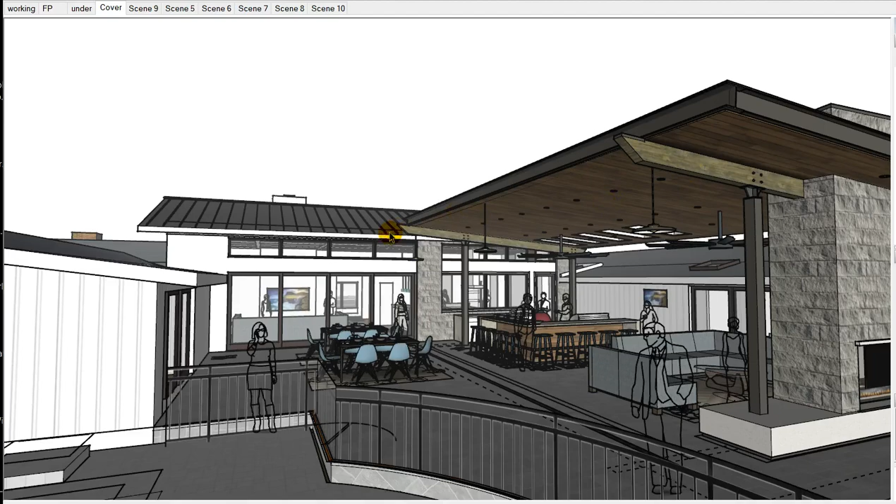Hi guys, I wanted to quickly show you three different roof options that I think are worth considering for the newly increased height area, the kitchen and the family room. I'm calling them the light touch, the medium touch, and the heavy touch options.

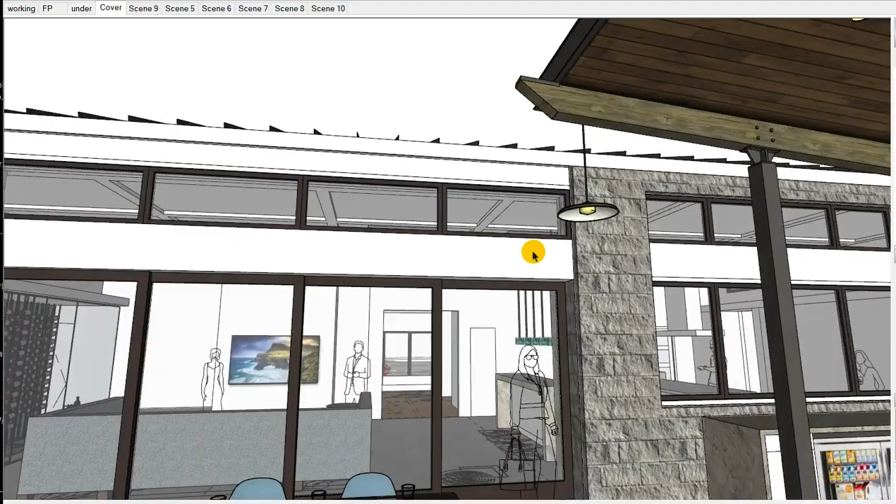Now here we're looking at the light touch. This was the one I was showing you before. I think it's appropriate given the scope of the work you're considering, concerns about the total cost of the project, and strongly based on the images you shared, which had this flat gridded ceiling.

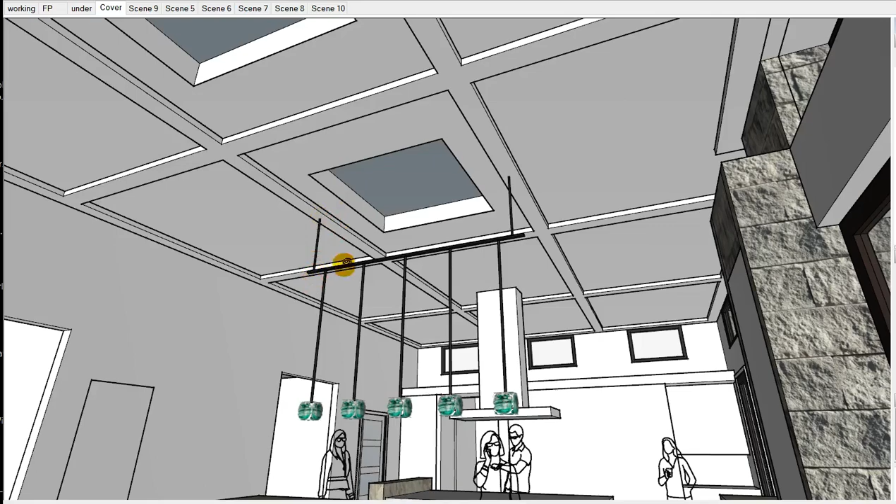Two skylights here, I think, work really nicely, as stated before. You mentioned a concern that pendants may not work at the skylight, but I think a solution like this would work, where a custom bar could be built and suspended, with power routed through it to the individual pendants that hang from that. If it can hang from a ceiling, it could be modified to hang from a bar. So this is an elegant solution for any pendant array you might want, including the little 5.5 inch glass spheres you already have.

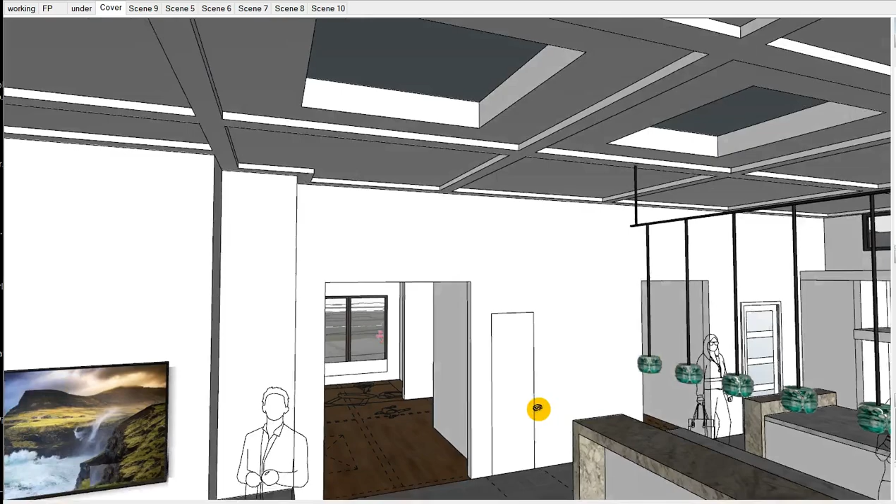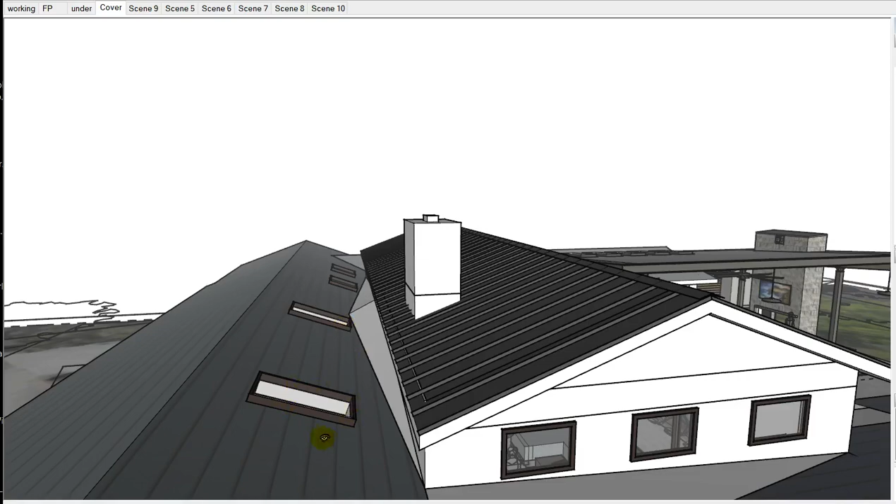So I like this option, but I know you have valid concerns about how water's going to shed away. What I'm showing here is conceptual. Your builder's roofer might be able to make this even better. Your roofer and flasher, when they get up there and actually see the skylight openings, might be able to increase the slopes of these crickets to get the water out and away even faster.

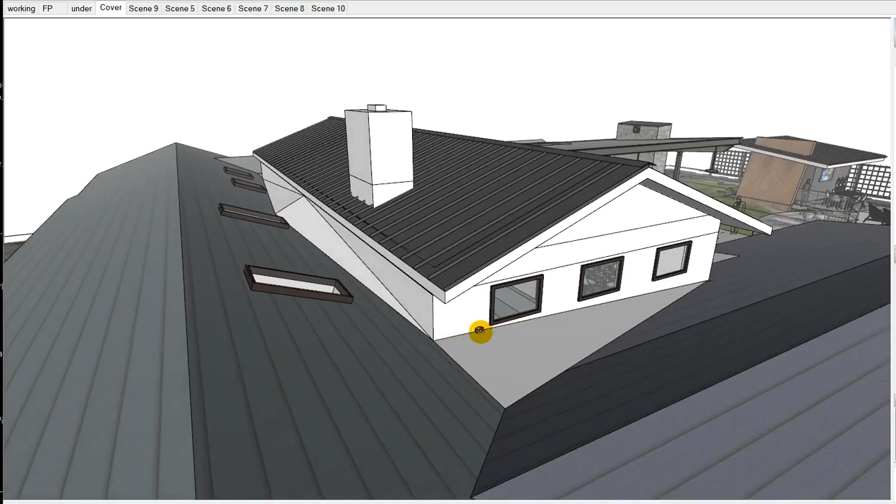But when water lands in this spot or on this roof and starts coming down this way, it's got a clear path out and around. That's what's shown in white right now. Again, this is all conceptual, and it's tight. This is not an ideal solution, right? But you guys know you're not in an ideal spot, having to remodel the project on the fly.

But this, I think, is the most cost-controlled method without really sacrificing anything on the design. I love this design. First and foremost, this design is great. I think this works, right?

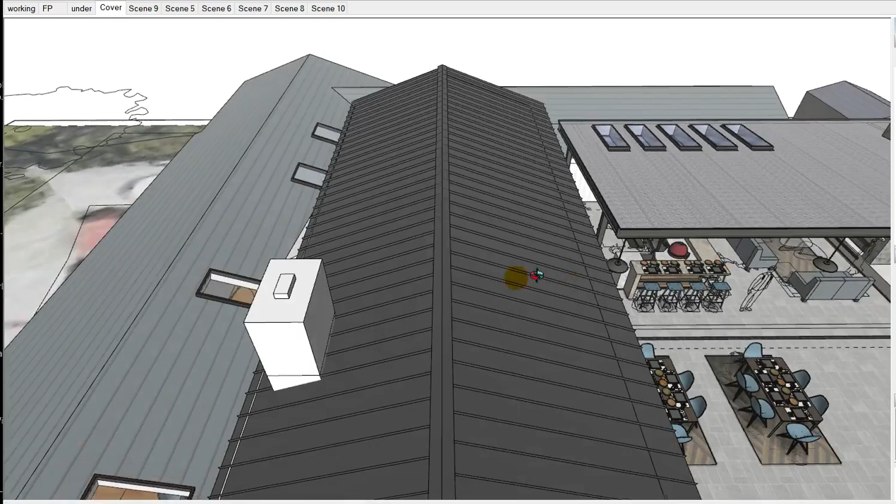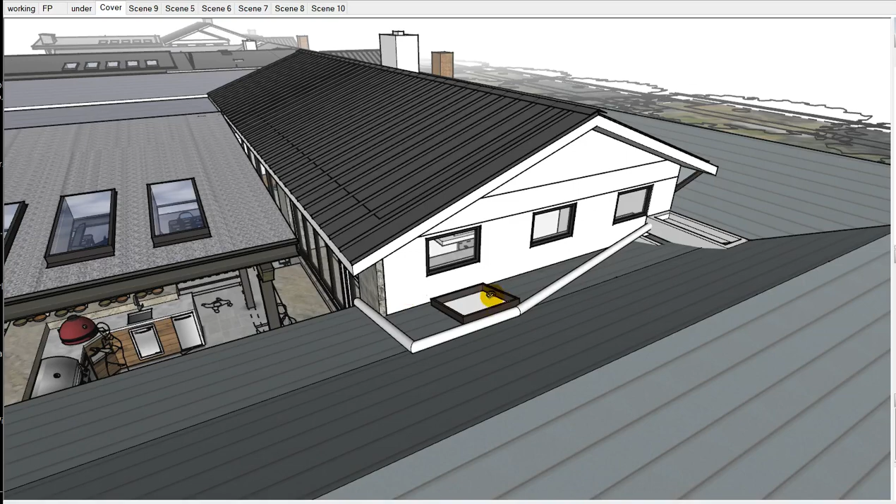These are the existing skylight locations at your existing roof. I think this has minimal impact. On this side, maybe it gets a little wonky. I'd love to build another cricket over here, but there's this existing skylight at the hallway, and if we do a cricket, it's going to bisect the skylight. I think that's going to get a little weird.

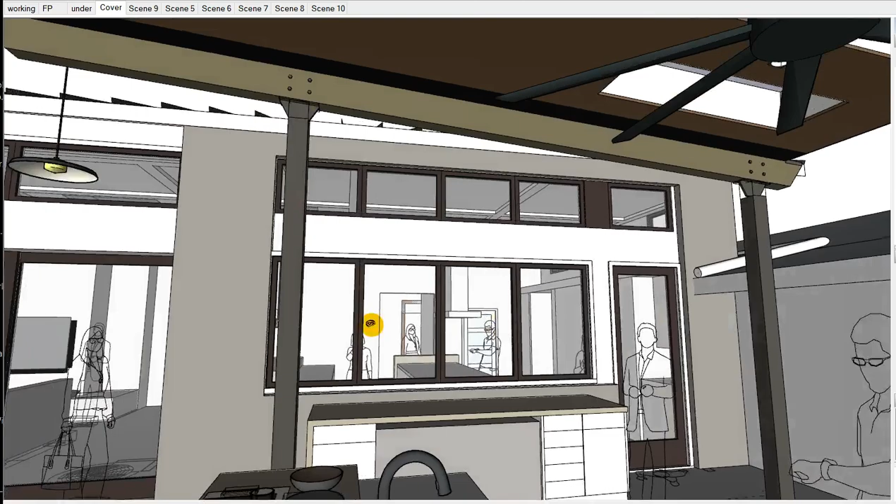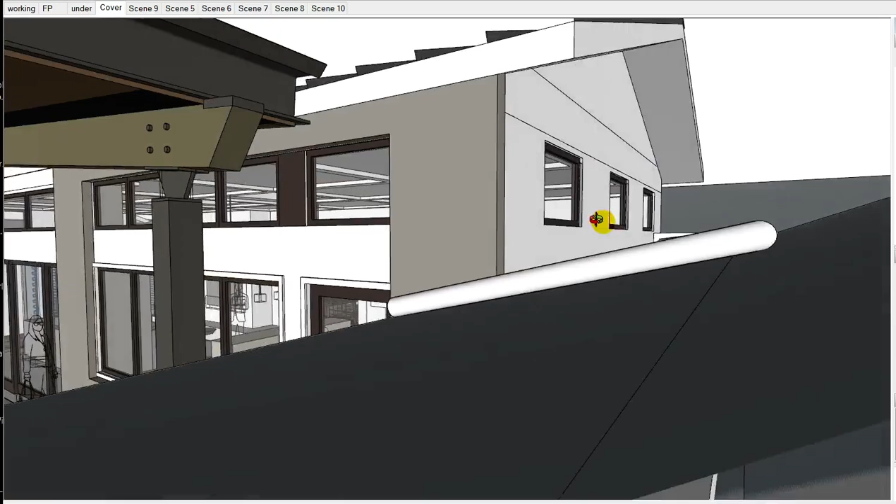It's not the most elegant solution, but it works, engineering-wise. And I think there's plenty out here that's going to be distracting to the eye and draw more attention than a hard pipe here that minimally impacts the roofing in this scene. But again, we can work on other options here. All right, so that's the light touch.

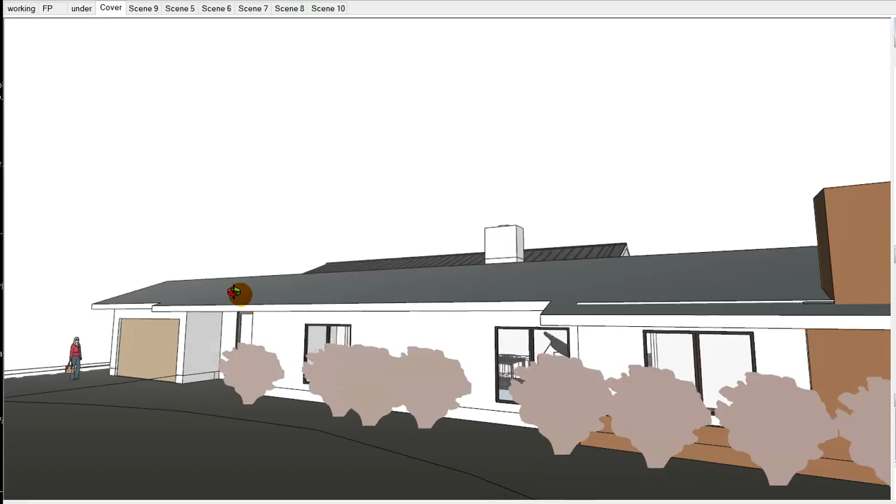Let's skip the medium touch for now, we'll come back to it. Let's go back to the light touch. From the front, the street view, what we see at eye level is just a little bit of new roofing, detached from the main roof. I'm not really showing anything up here, not showing a new garage addition yet. We can look at that later, but this all stays relatively untouched.

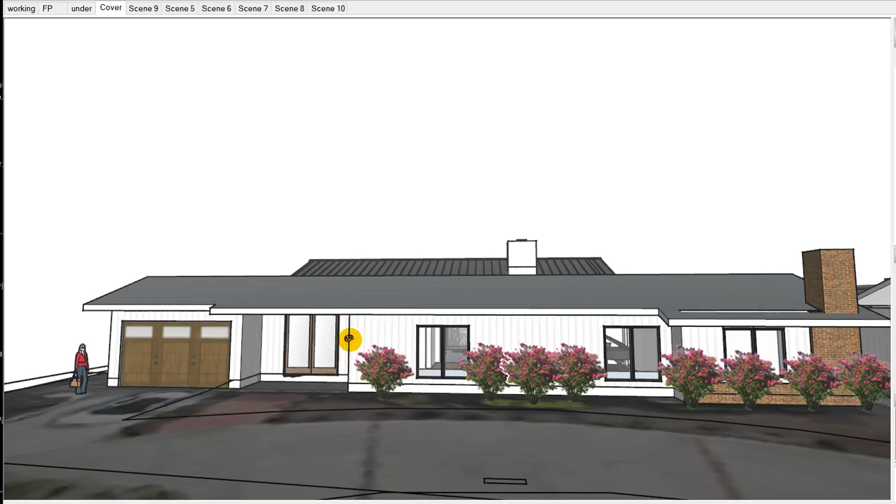Again, to minimize costs. We could certainly incorporate some elements from the heavy touch or medium touch to this front facade if you like them. The two aren't necessarily mutually exclusive. But let's take a look at some of the other options now from the back.

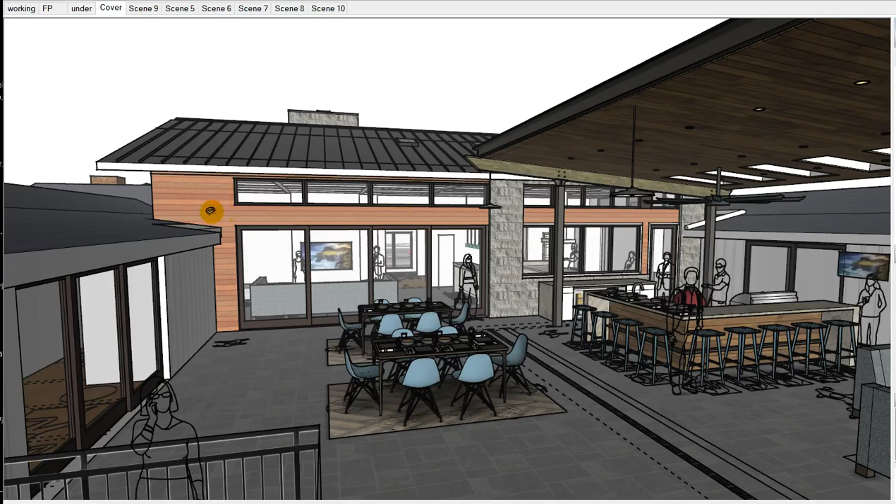So the heavy touch option starts off with an exact same similar rear elevation as the first, except I'm showing an upgraded hardwood—or not hardwood, not real wood, but a wood composite or wood-like siding material here, just to change it up a bit as a visual cue.

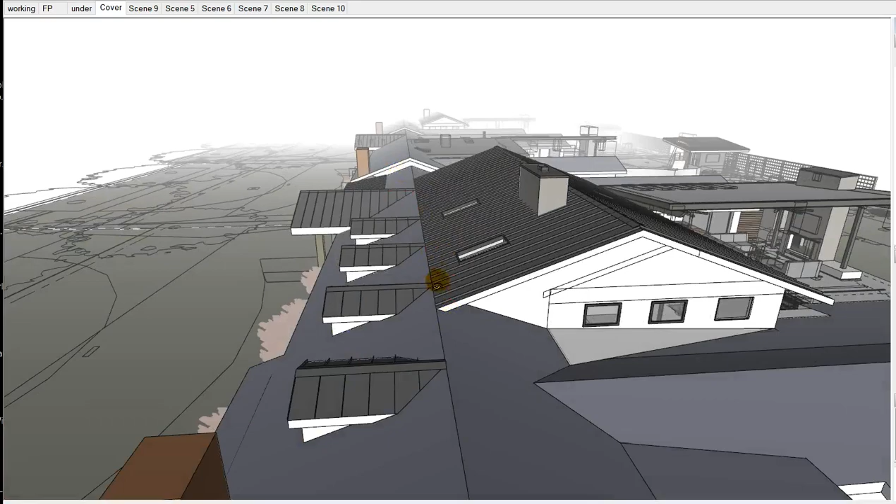Either or, right? So here we're showing the exact same roofing. It comes up, but instead of coming up and down as this line is visually demonstrating, it keeps going up until it can come down flush with this roof plane, right? And so that eliminates most of the hog valleys, not all of them. There's still some hog valleys that remain at this roof.

But again, they're not impossible to deal with. If we like keeping this window, which I do, the hog valley should be limited to this line rather than continuing it up and making it further steeper.

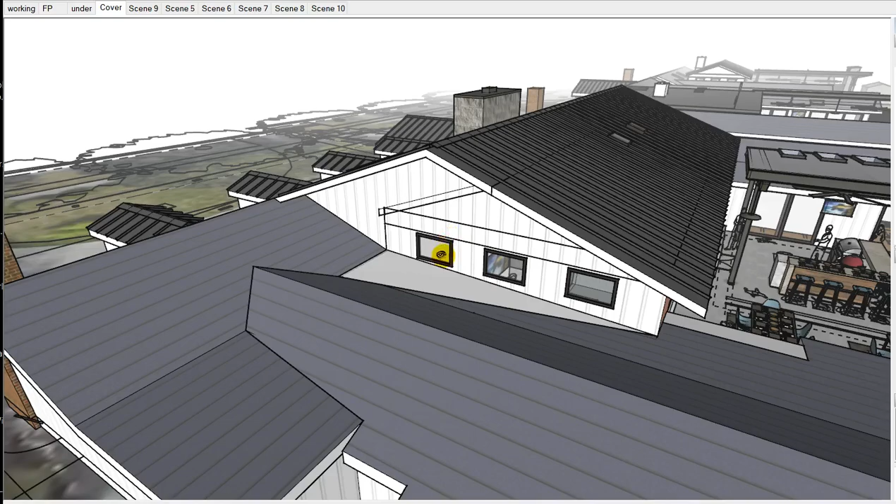We like this window here, so let's incorporate some hog valleys. This comes down and touches the existing roof, eliminating this entire stretch of hog valley, which is certainly nice.

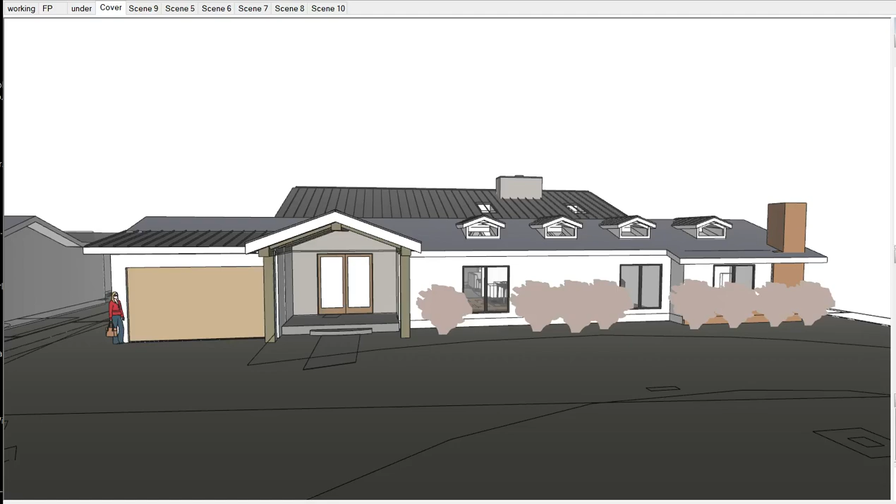But a trade-off of this is all of this extra roof comes down, and we need to do something else to the front elevation to combat all of this new mass.

Without popping in these dormers here at the existing dining room library area, one here above Jenna's new office, and this new entry feature and the garage pop out, things start to feel very awkward and ad hoc. You've got this long wing coming out here that's single story, then it swoops all the way up really high, with very little going on at the roof.

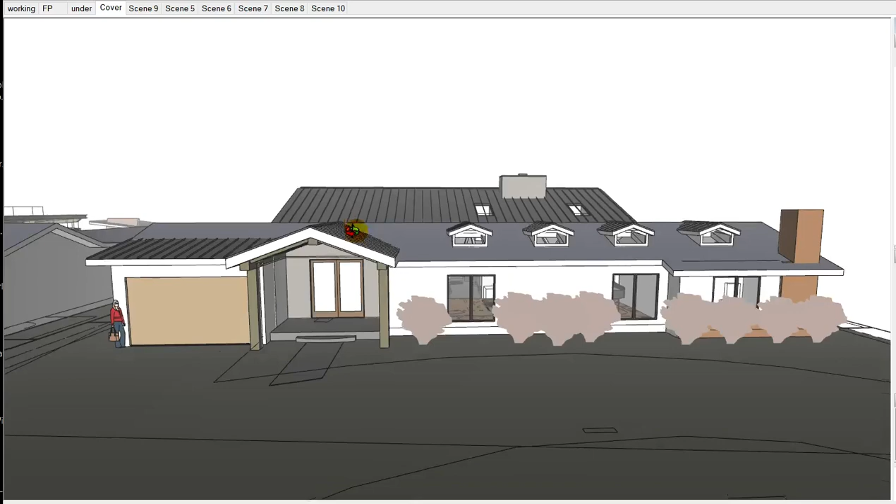Actually, I think I'd have to redo this. I need to show two more skylights, one at the pantry and one at that entry hallway. Those existing skylights here need to extrude up like I did for these two, but there's two more here, so we'll see those as well.

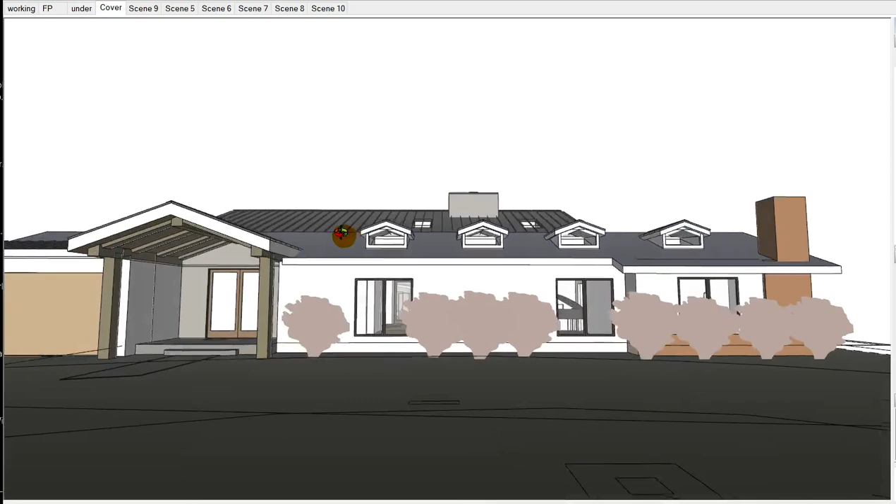So we need to add elements in the foreground to split up this large roof mass. And of course, the chimney gets much taller because we still need to maintain that 2-foot code required clearance from the top of the chimney to the top of the roof ridge.

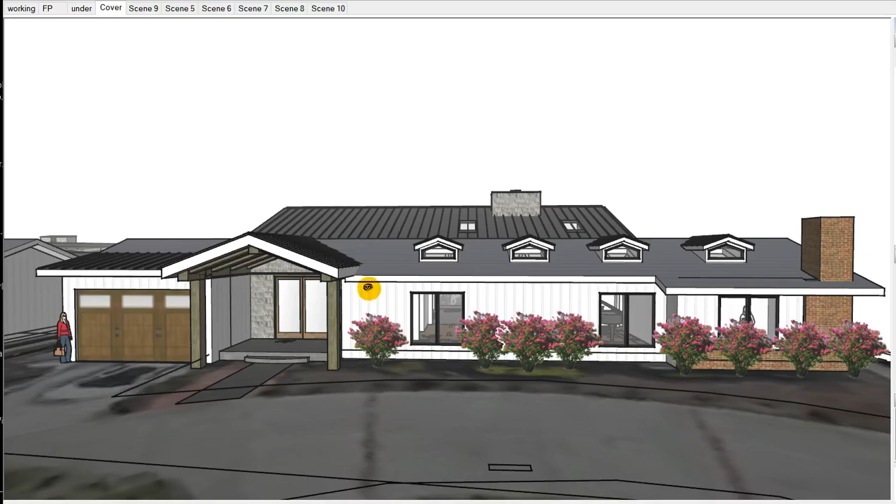So while I love this look, it's a lot more cost, and it starts to get a little cumbersome here with these elements, these roof dormers that I love expressing on the inside, centered right over the existing windows, and one more centered between them, which happens to be centered right on the fireplace here.

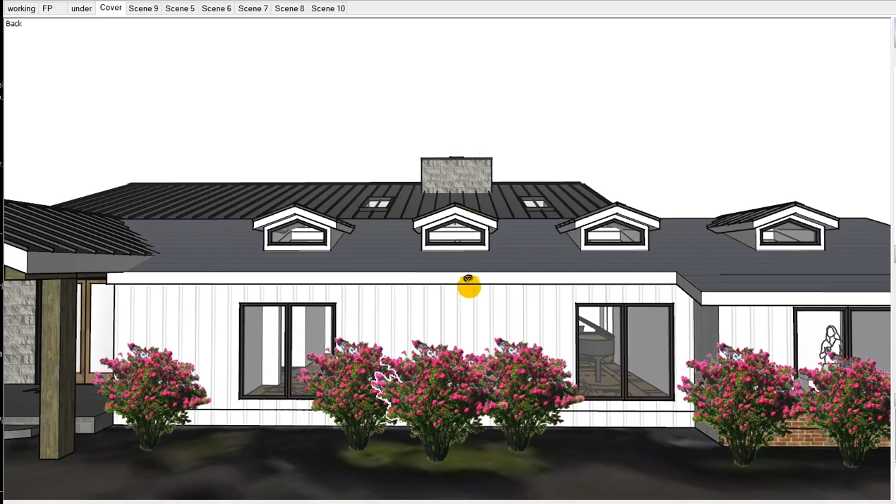I just think that's so wonderful, except it's not really perfect with the existing rafter location, right? There's a bit of a conflict. It gets a little bit cumbersome.

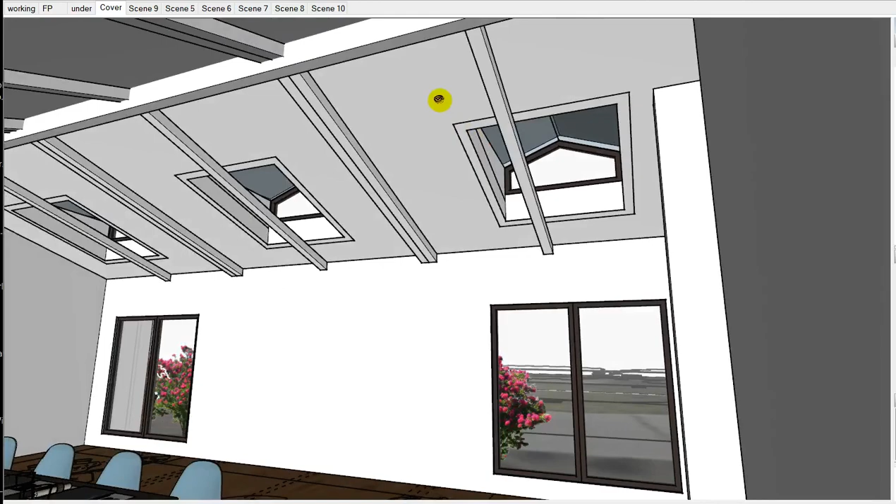I'm not showing the existing wood texture here, but if we want to salvage that and reuse it, it starts to beg the question of whether it's worth going through the trouble of adding these elements, which would bring in even more light into your library space, which we're obviously a big fan of, but we also like the character of this existing ceiling, right?

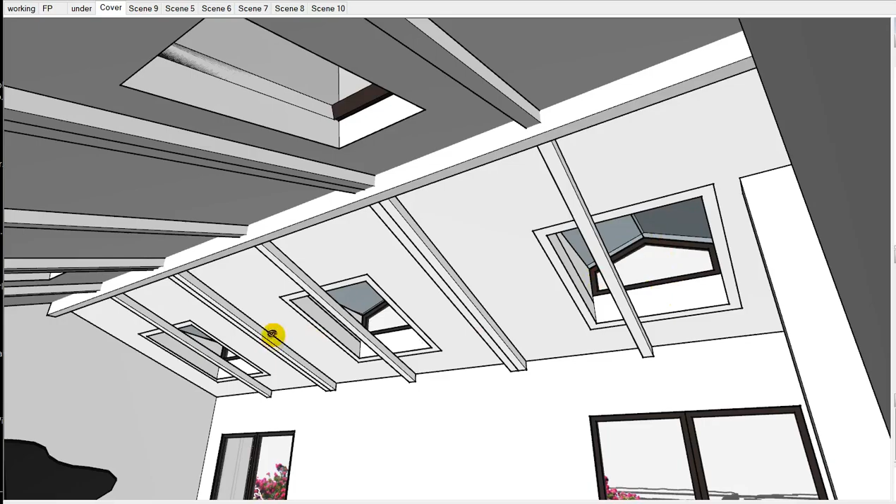If you're flexible about this, and I can take a bit more of a carte blanche approach with where these rafters fall relative to these three new dormers that are centered over these windows and centered over the space between, I think this could be very successful.

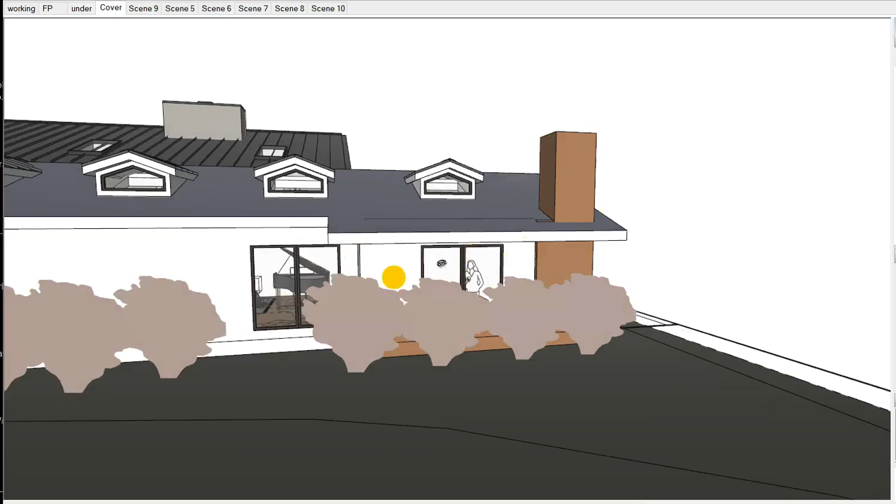I like adding one more over here at Jenna's office too, although I haven't fully mocked up the ceiling in this space, so we'll come back to that if we're liking this look. I think it's a very interesting composition - this 3, 2, 1, and again there'll be two more over here.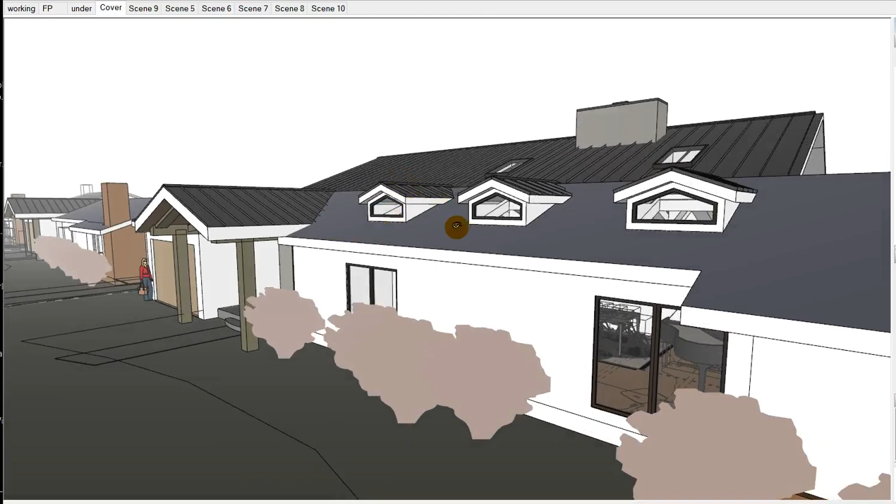I think a case could be made for keeping the old roof as the solar tile and then switching to standing seam metal roofing everywhere else. I think those might be nice accents that would counter the glassy look of these solar tiles.

But then again, at the back, it's more or less the same as the light touch option, and that's intentional.

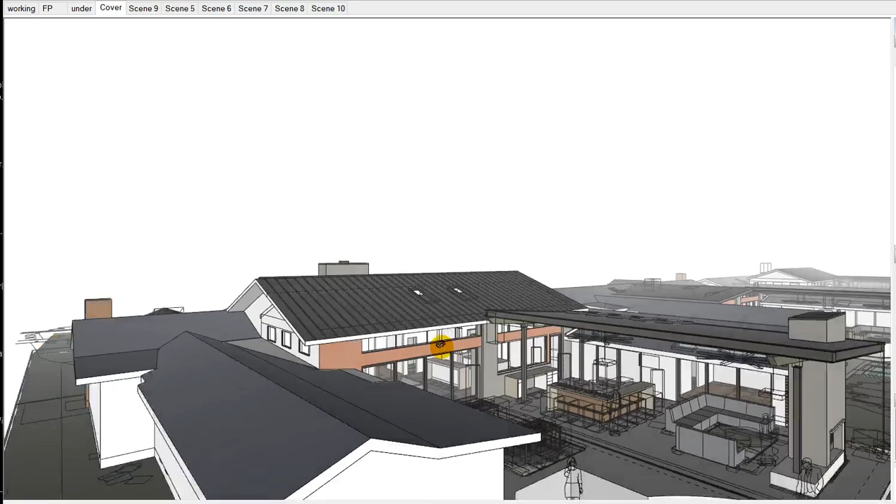Now let's take a look at what I was calling the medium approach. I went back to - I couldn't let go of this one idea of taking that old patio cover that we had designed, and this is so roughly done, please ignore how sloppy this is, right?

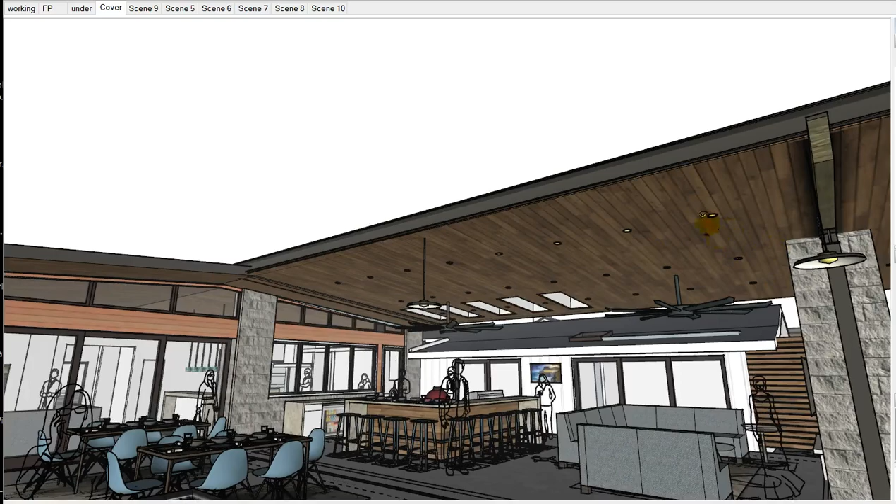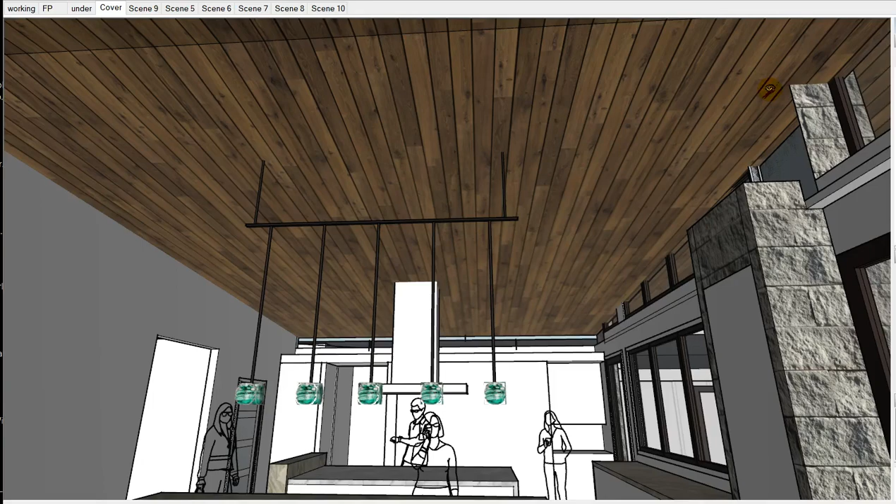If you like this idea, I'll clean it up, of course. But the idea is taking this patio cover that we had designed, and instead of it being supported on 4 columns separate from the main house, what if it tied in together and continued through these high windows at the ceiling, carrying across into the kitchen and family room, with the same wood soffit and ceiling material continuous both inside and out.

I think this is pretty interesting. There are some caveats to this one.

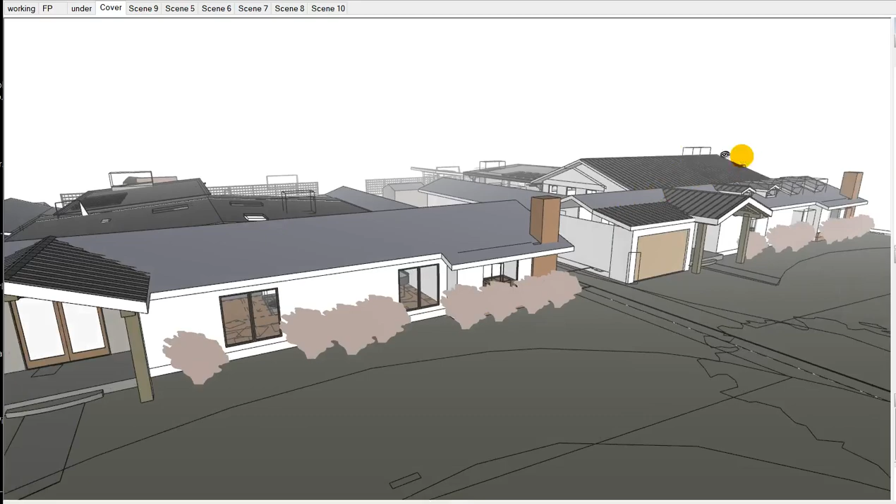In order to keep this low slope nice and clean at the front without getting too cumbersome like this roof was doing, I want to limit the ridge to be no higher than the existing ridge, so that from the front we don't have to add these dormer elements. We can go without them because we're not adding any major roof mass here.

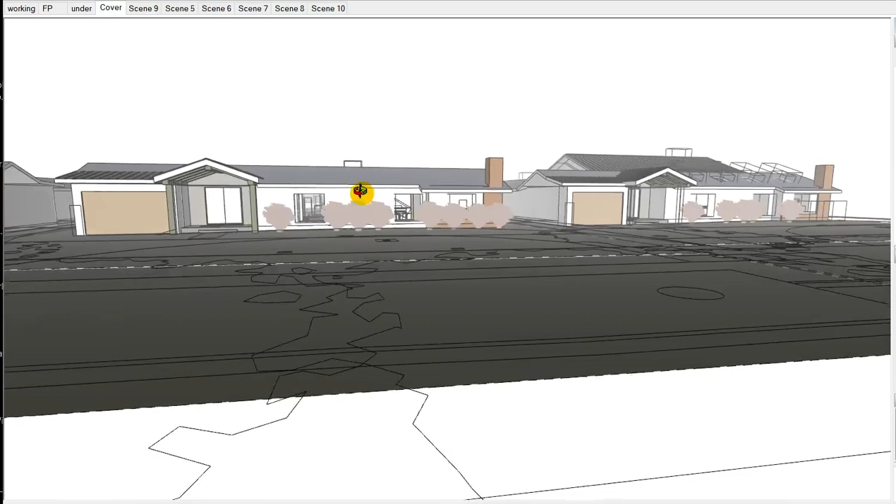Maybe we do the garage bump out, like a 4-foot extension to the garage. We could bump that out with a low slope shed roof over the garage, and a gable here that frames the entry a bit nicer.

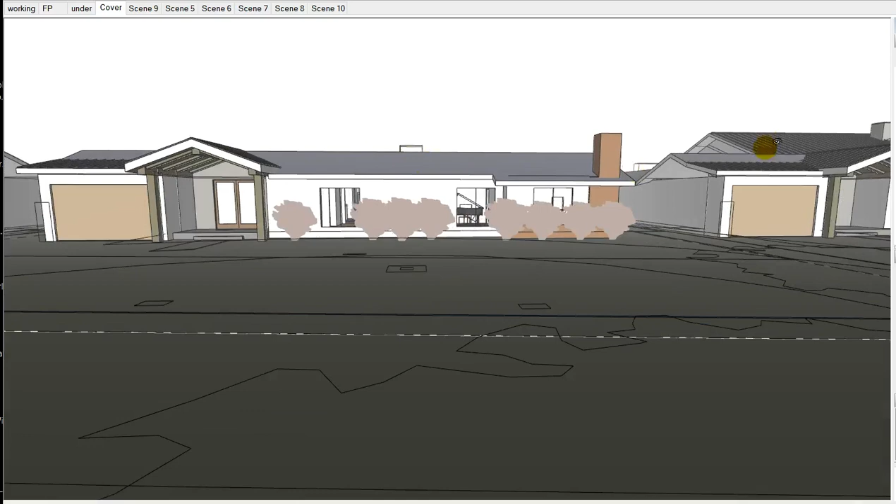And that's pretty medium touch at the front. It might be worth still adding the dormers in, and we could do that still. I think I have them on this layer here, let's see if they pop up. Ignore that line in the back, but you can see we could still add in the dormers here if we thought that was worth it to spruce up the library dining room.

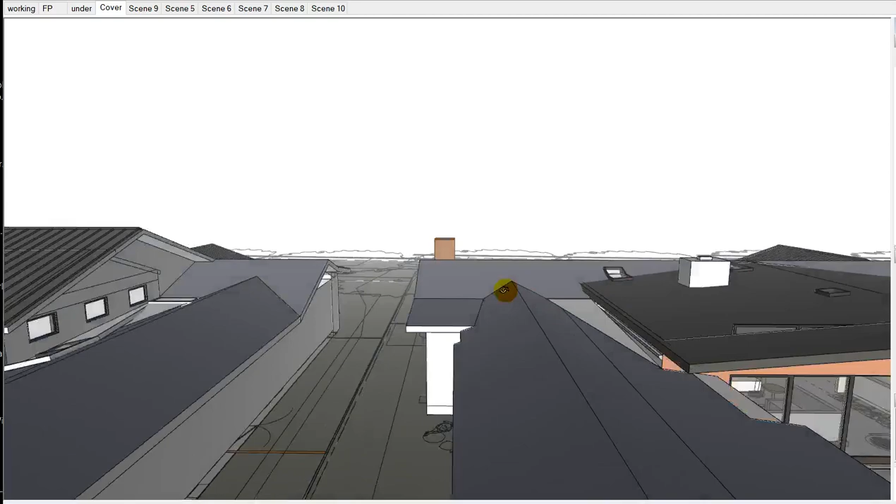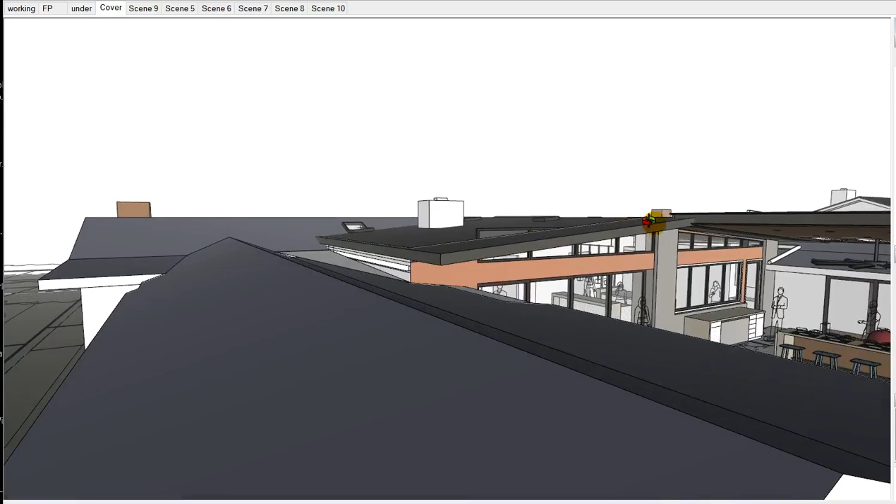From the back, the negative trade-off about this is the ceiling heights are lower now, because I wanted to stay constrained to this ridge. I didn't want to exceed that ridge height, because then it starts to look weird when this point creeps up above the ridge line. So at the slopes we want to maintain to make this standing seam roof slope properly, excuse the mess, we wind up losing the side windows here.

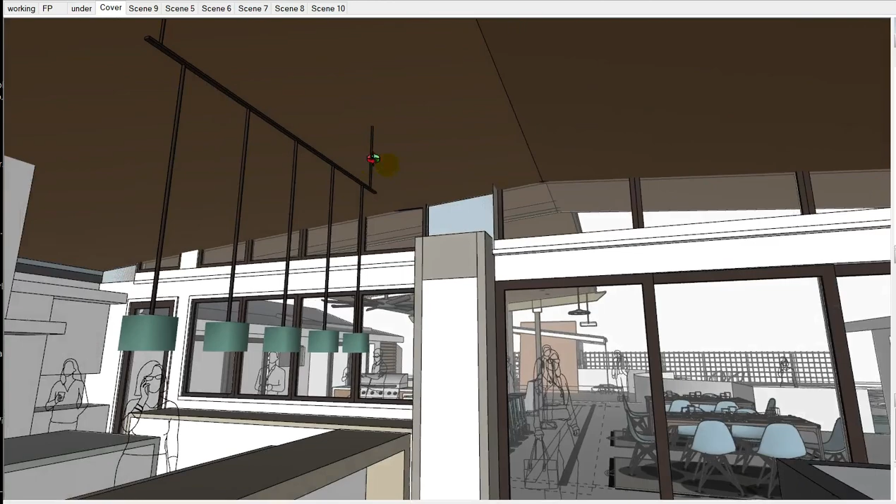So we lose the side windows, but the indoor-outdoor connection we'd gain by having this ceiling continue might be worth the trade-off.

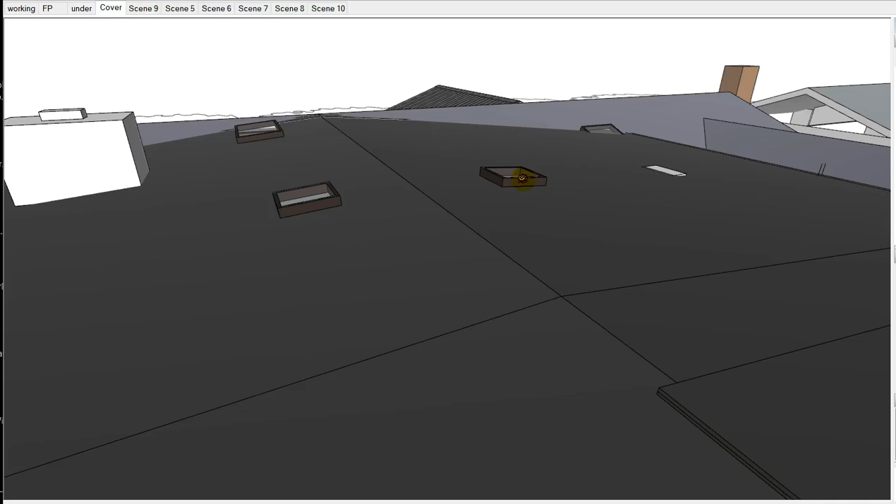I'm not showing it, but there could be plenty of skylights in this roof too, especially since this would be a vaulted ceiling, meaning the ceiling slope attaches directly to the sloped roof framing. The skylight shafts will be uniform depth — the ones in the middle won't be taller than those closer to the ceiling plane. It's consistent throughout, so we can pepper the roof with skylights, but we can add quite a few to this ceiling plane to add visual interest and make up for the lack of side lights here.

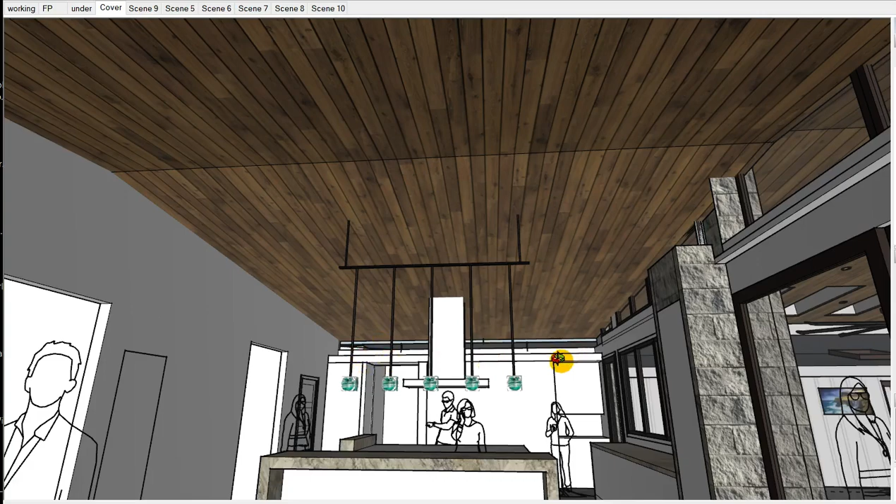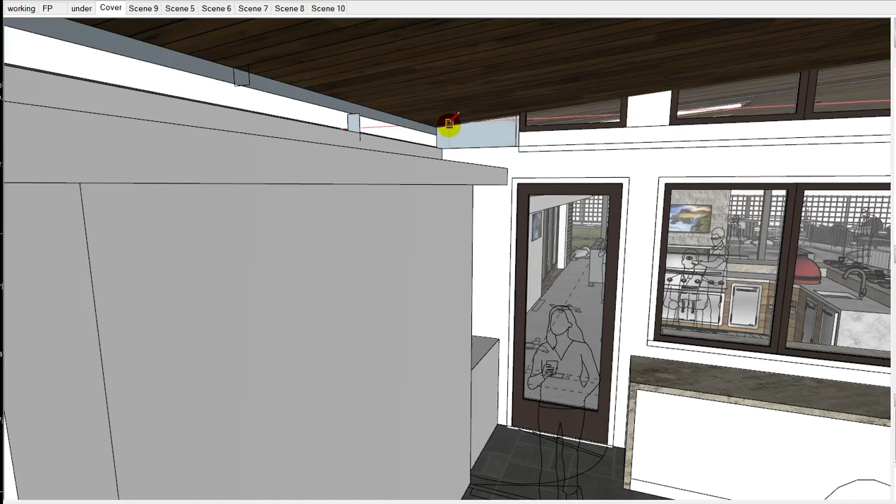But still, it's a tall ceiling height. This ridge height here in the center would be just about 12 feet. And at the wall's edge, it's a bit messy, but we're approximately at 9'10" — I'll call that 10 feet. So averaging 10 and 12 feet sloped gives an average height in here of 11 feet. Let me confirm — yeah, 10 feet at the edges, 12 feet at the center.

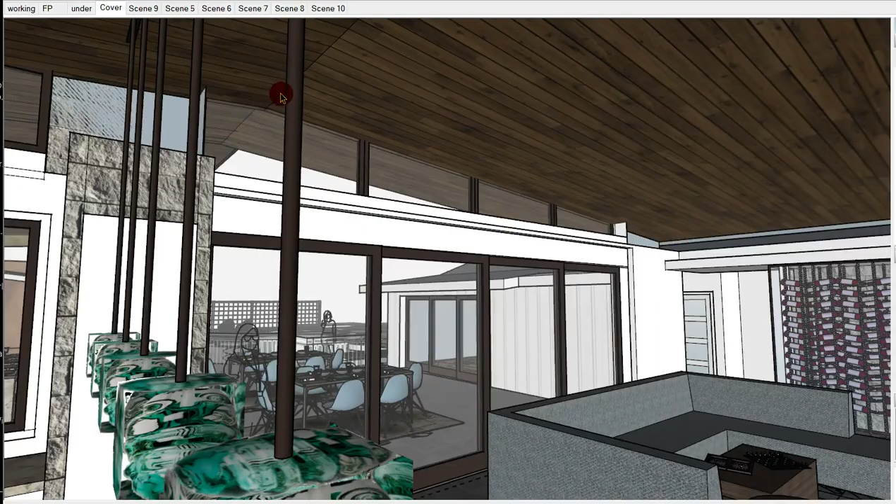I think that's a decent amount of height.

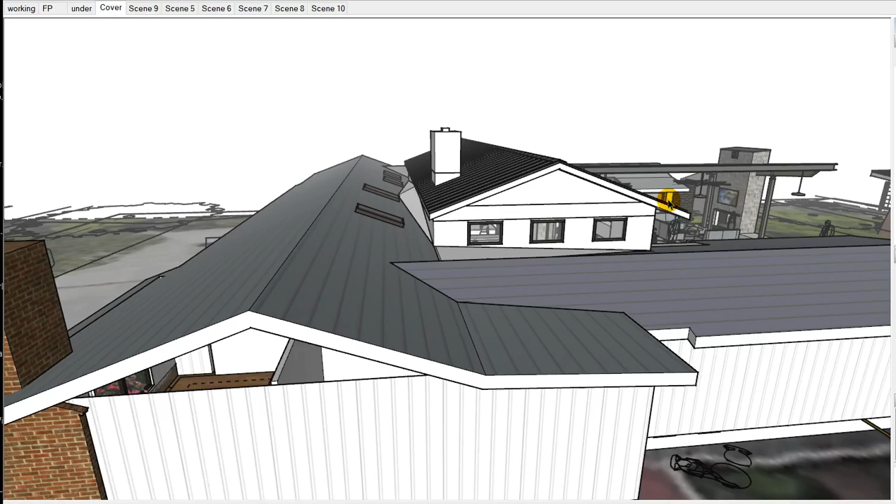So those are the three options I think are worth considering. This light touch option with a simple gable with an attic — so there'd be a flat ceiling and an attic with a simple gable, with crickets all around and hog valleys to get the water out and around, but more or less keeping the existing roof as is.

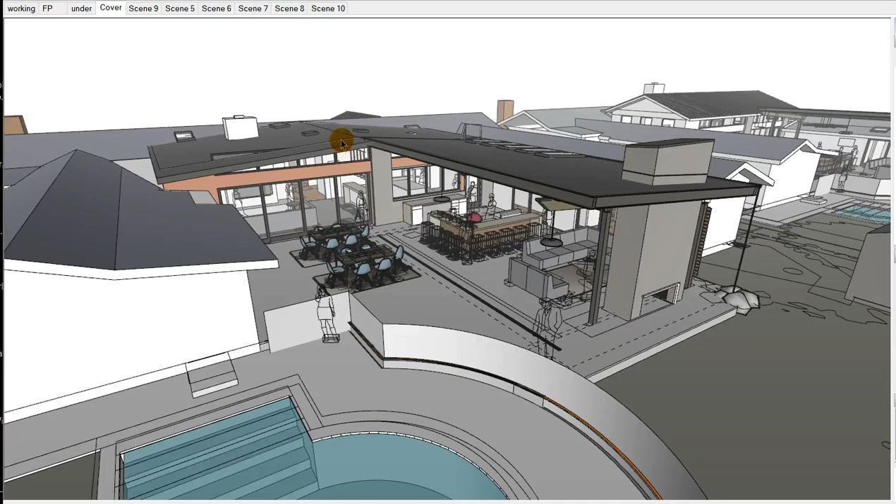The medium touch option kind of changes up the design a bit at the back. Instead of a cross gable, we'll go with a gable that is half extended, which feels a lot more contemporary.

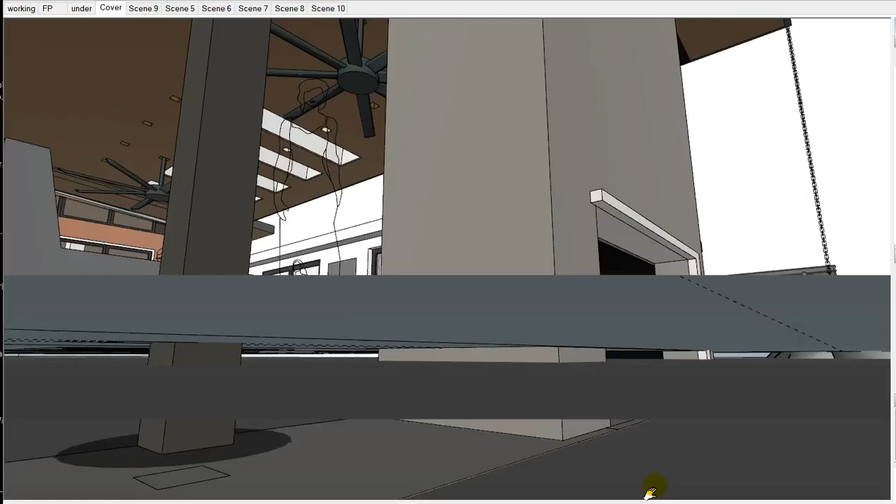Forgive me, this needs to be cleaned up. As this lowered down, this actually dropped down a little bit too, so you can see we lost a little bit of overall height to this element. Not much, about 2 feet. So I have to raise that up about 2 feet to get the look back, and it doesn't feel squatty.

Look at these people — plenty of height. This still needs to be studied a bit, but I still like the way the existing roof comes in underneath it. There's plenty of open space between here. I think this is worth considering.

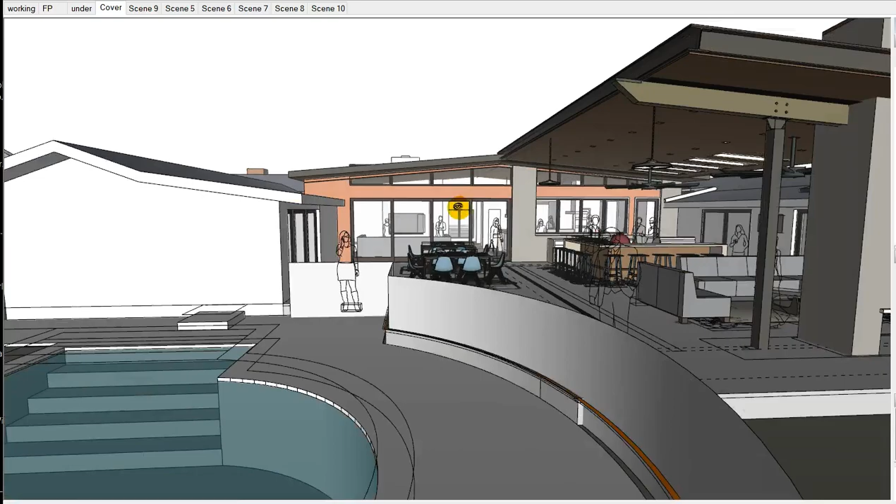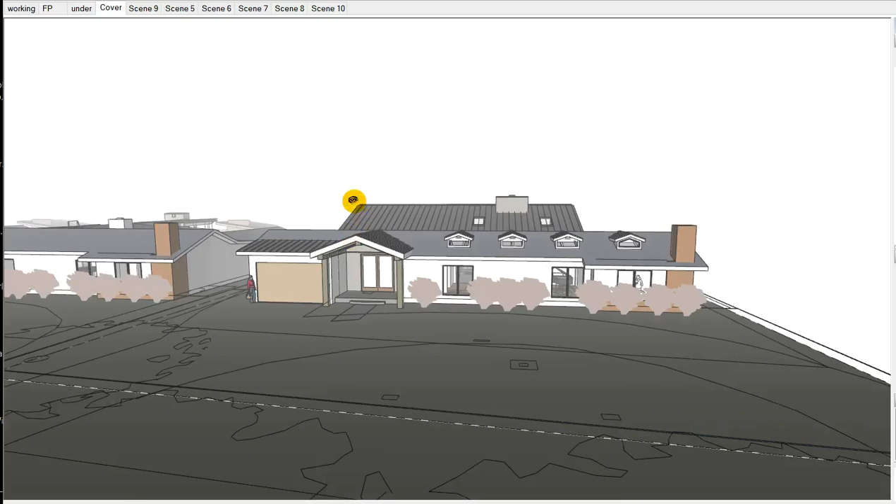And then the heavy touch option, where it's very much like the light touch, but we just carry the roof up and back to connect to the front plane, eliminating most but not all of the drainage or cricket problems. With this option, because of the added mass here, I feel compelled to add the dormers to break up that roof plane.

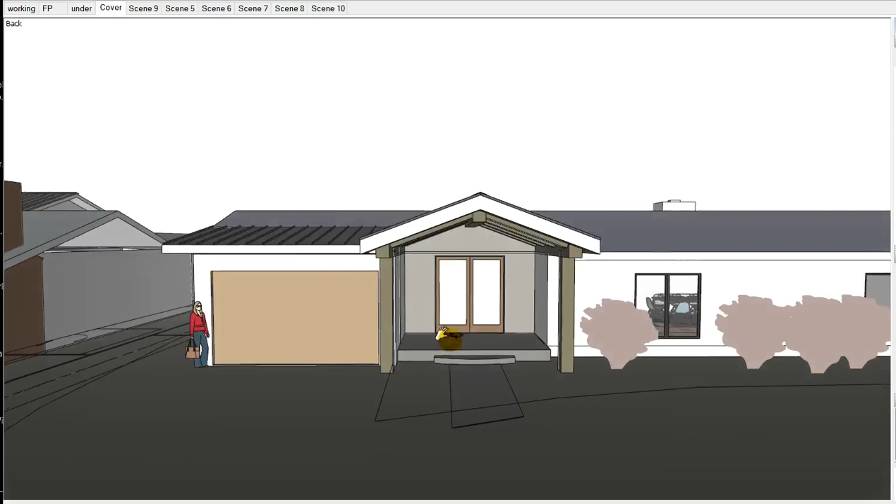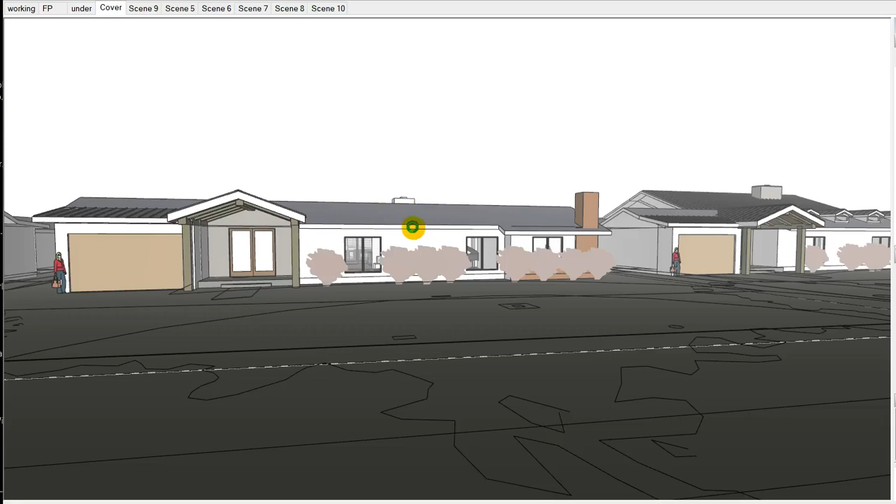Whereas for the medium touch or the light touch, I think these elements are more optional. Although I really like having the new garage extension, and the new front entry porch roof element — it feels really nice and further announces where the entry is. I do think these dormer elements are nice, even for the medium or light touch option, so long as we're willing to explore touching the library ceiling a bit more extensively than necessary.